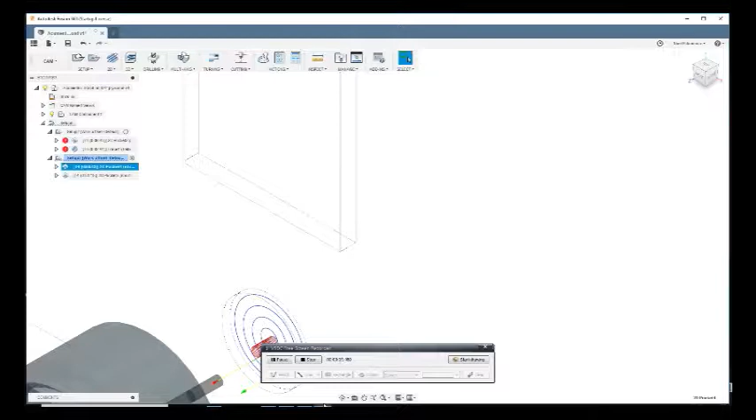Hello, this is Noel. I'm working on calibration of my CNC machine through Fusion 360 and Mach 3. I came up with a small circle, and I know if I pan I get in trouble here. I made this 1 inch diameter circle, and it is 0.1 inch deep, and I'll look at some of the tool here.

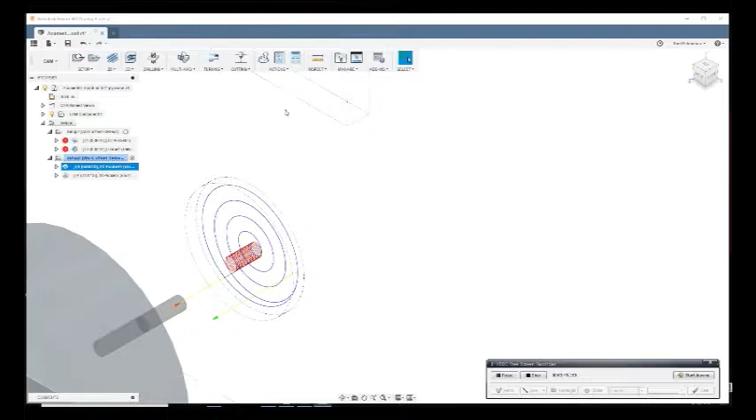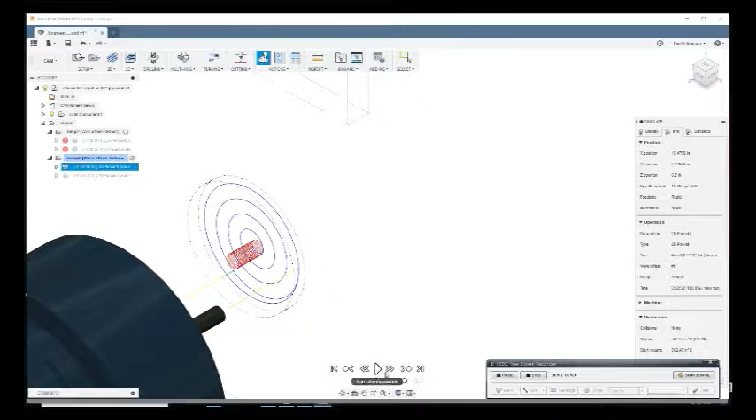I'll show you the simulation, and I want you to look at this number right here as it's going down in, and it spirals out to form the 1 inch diameter circle. And if I go back a little bit, let's see, I want to pause it right when it gets to the bottom. The number is negative 0.14. We asked it to do 0.1. I'm not really sure why the difference is.

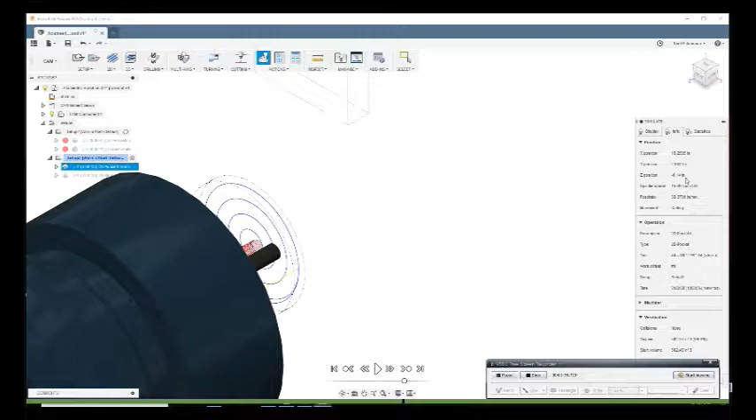This is a bit I bought off of Amazon. I don't want to say it's from China, but it says made in China. There's no description with it. The only thing I can do is diagram it and put it into Fusion 360's tool editor. And I draw a little diagram to help me get the numbers, use my caliper to help get good numbers.

I was using this bit for very small detail work and calibration work. I don't know what to say about it. It was very difficult to count the number of flutes on it. I came up with 11, but I think I typed in 12. I need a little better of a magnifying glass to count the flutes on it, but they're very small and they only go up the bit a little more than 2/10 of an inch. But I didn't break it. I was running it at about 15,000 RPM, and I plunged it in.

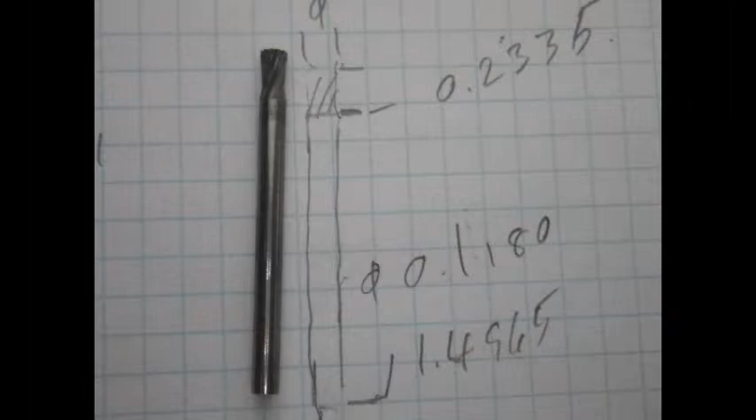Here's the bit in action on cleaning up the 2 inch by 2 inch, 0.2 inch deep, when I went from 0.02 inch of stock remaining axial and radial to 0. So it's going to cut approximately 0.02 inches off, but it will follow the same pattern to get down to the bottom. So it's ramping down now, and it starts quite a bit above the material and ramps down. It then contacts the wood,

and I've turned the sound off on the actual video because it's just white noise and you wouldn't be able to hear me. I'll try to find some way of blending it in, but there's really no way to talk over the sound of this thing. So it puts up a lot of, not shavings, but splinters as it's going through, and I probably don't have the right feeds and speeds, but it is clearing out the pocket.

And it works its way out to the edge. And it kind of cleans up everything when it does the final edge cleanup.

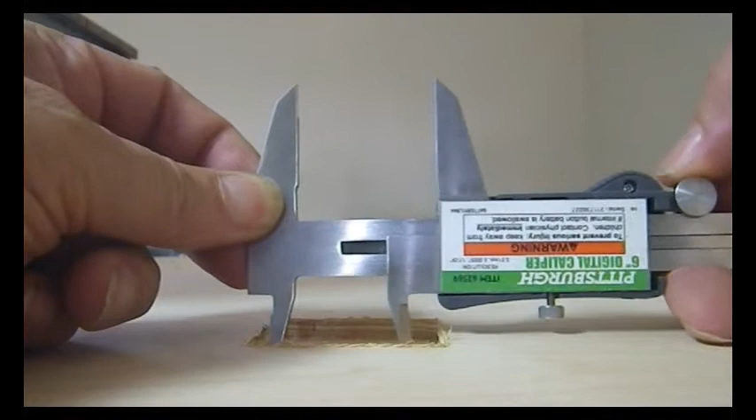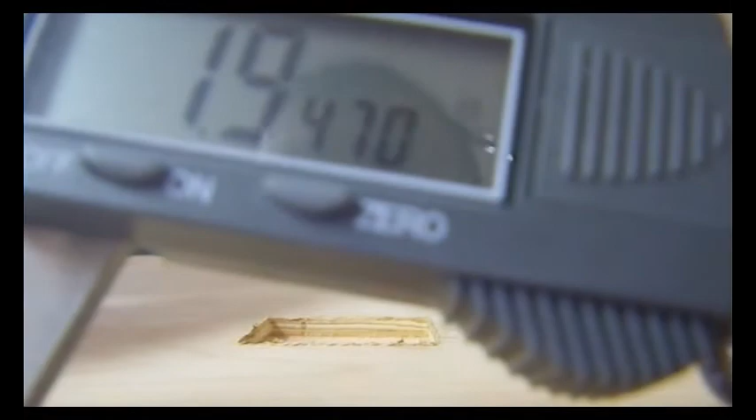Now there's a little bit of dead video space here. I'm learning how to edit my videos better. But I wanted to get this portion in where I use my caliper to get a measurement on the 2" by 2" and try to get it on the camera. That's 1.947. And this with the camera angle doesn't look like I got it quite square in the hole, but I was doing my best to do that. And we got a 0.9660 there.

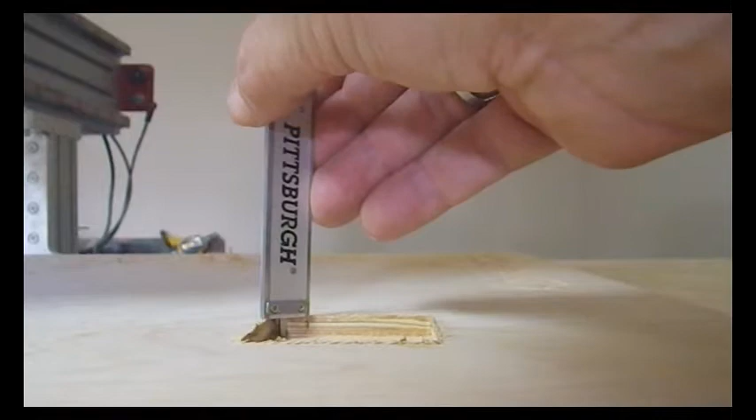This is how I do my depth. And there is a burr on the edge, but I try to pack it down. And it's hard to get in front of the camera here, but that's a 0.265. This is the circle that I did at the first part of the video. A circle seems to be a better calibration method.

It's spiraling down to the wood. I've got my Pentax WG1 on a small tripod. Once it spirals down, then it takes off on its feed rate. And this is a two-dimensional pocket. It's just clearing material. But I also took off the leave stock, axial and radial. So it cleans out that pocket quite quickly. I manually move the bit out of the way so that I can clean it up with a spatula and some sandpaper.

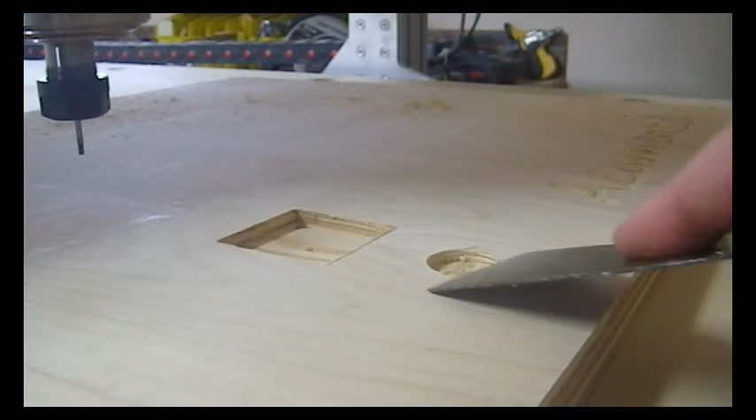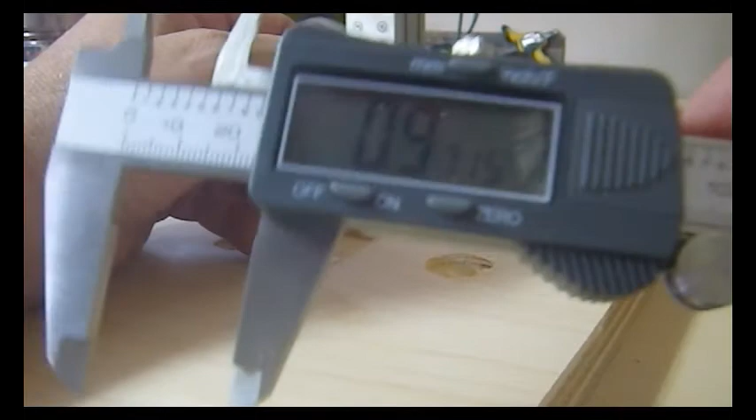Because I'm anxious to see how close to the 1" diameter circle I was getting. If this bit had bigger teeth on it, it probably wouldn't leave quite as many shavings attached. .97, that is pretty darn close to a 1". Less than 3/100ths. .975. And here I take the depth reading.

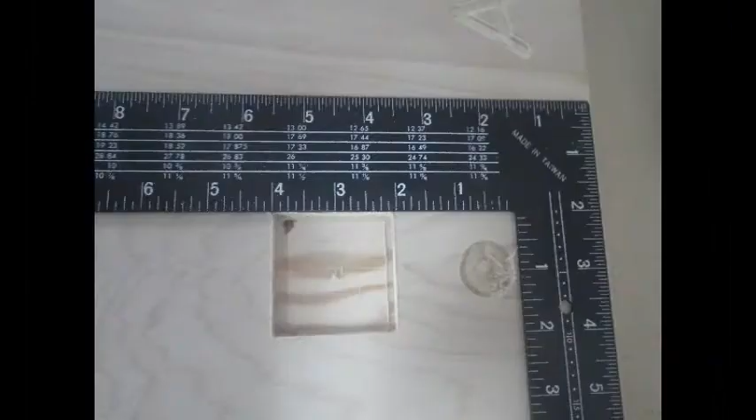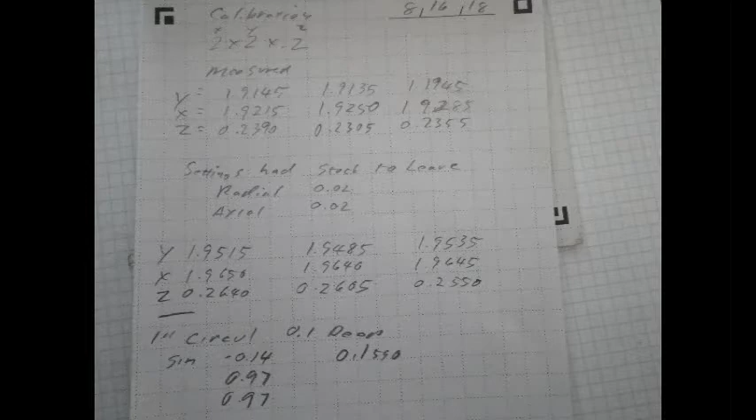0.159. Now the hole I had planned to make was 0.1. And when I did the model, it came out to 0.14. And then when I make the 3D representation on the table, it's 0.159. So I'm not really sure about the differences. Here's how I write my notes down. Better handwriting would be a benefit. So I typed them into a spreadsheet here.

For the first hole, first 2x2, I had the stock to leave, radial and axial, at 0.02. And so that's the reflection of the number difference when I transition to don't leave any stock. You can see that the numbers do change a bit. On the XY, it's going to be double that at the very least. And then on the depth, it would be that value.